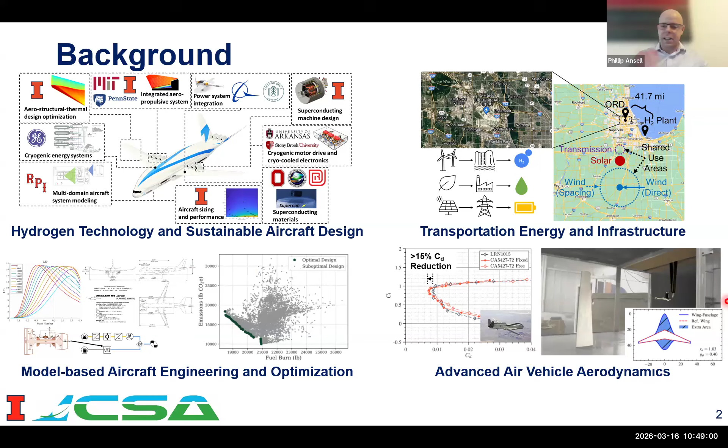And I'd be remiss if I didn't say, we've been in this. This is one of the things that we do within the work in hydrogen and aircraft technologies, so CHEETA, as you can see, is here. We do work, this is just kind of a brief background of some other things that my team does at the University of Illinois, looking at the landscape of hydrogen technologies and how it integrates into aircraft systems. We look at bigger life cycle elements here, and this is some of what you'll see today: on the production and supply side, what developments are necessary if we can reconcile the whole complex system of systems that surrounds the fuel system side. We also do a lot of aircraft design using model-based design and optimization, whether it be hybrid electric, whether it be hydrogen hybrid electric, which we'll talk about later, as well as I have a passion and background in aerodynamics, so wind tunnel testing, aircraft design, those types of things.

The work that I'm going to be talking about today, as I mentioned, is a little bit atypical for work that we present within my research team.

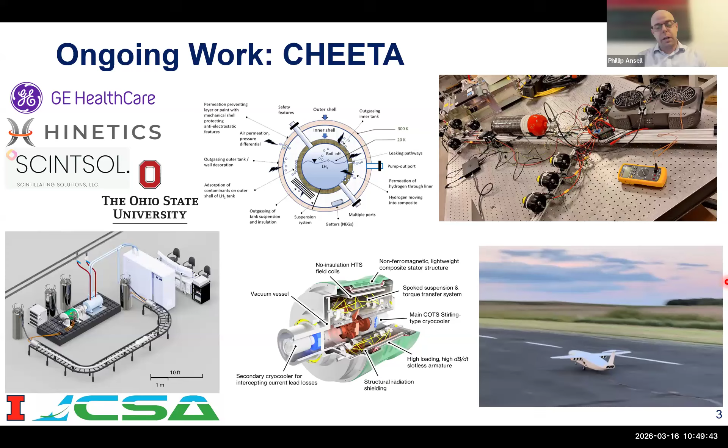Just to keep you all informed, we are continuing to do work on CHEETA. I saw Andy was in the audience today, so glad that I was able to show off some of the work that's ongoing there, whether it be to test hydrogen fuel cell systems on UAVs, or whether it be to develop advanced cryogenic electric machines that can offer dramatic improvements in specific power and efficiency, all the way to actually building prototypes of liquid hydrogen tanks. These are things that we have ongoing under that program.

We're also in the midst of working on this program, also supported by NASA, called AACES, and we're working that with Jet Zero, ZeroAvia, and a small group, SHZ. Here we're looking at the hardest to abate sectors, long haul wide body classes of aircraft. What kinds of technologies can we integrate, how do we marry hydrogen technologies with blended wing body aircraft technologies? We're cooking up some really interesting stuff. You'll be hearing more about it.

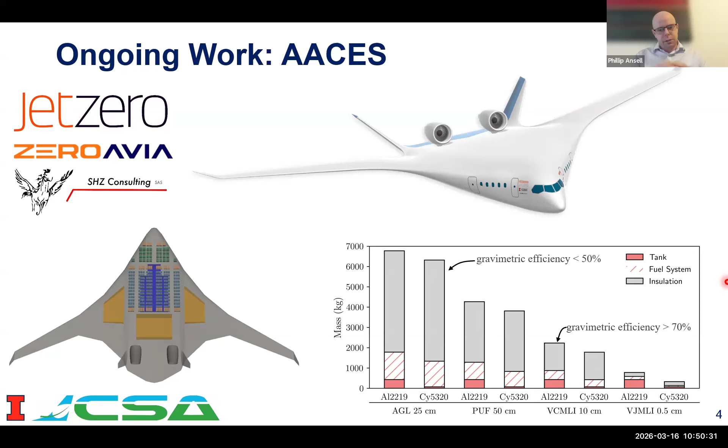One of the things that was indicated was ongoing things for the summer conferences. There's some work that we'll be presenting at AIAA Aviation, and there's going to be more things coming down the pipeline here into the future.

The hybridization approach here is perhaps not what you typically think. We're not taking fuel cell power and boosting the fan spool, but rather we're actually using it as a means to improve the adaptability of some of the core technologies. So allowing independent control of the overall pressure ratio as well as the mass flow through the core allows us to actually make the gas turbine engine functionally operate much more strategically across an entire mission duration. More on that to come, also incidentally, at AIAA Aviation.

But I'm going to jump into what we're going to talk about today. So today's talk...

This is all based on some work that I had my arm twisted to do by one of the editors of this journal, Progress in Aerospace Sciences. It's a great journal. This article is available in open access form, so anyone can go in and download it. It's available, feel free to pick it up, and there's more details in there under the hood of all of what this work entailed.

My disclaimer here, and I put this just because, again, this is like my crystal ball approach of trying to take this complex system of systems and project what is within the art of the possible around a scenario for hydrogen aviation by the year 2050. Not to say that we have figured everything out, not to say that we have reached this precipice where we have ultimately decarbonized the entire sector, but rather what is maybe a bullish but practical and technically credible view of what might be the case by that time frame.

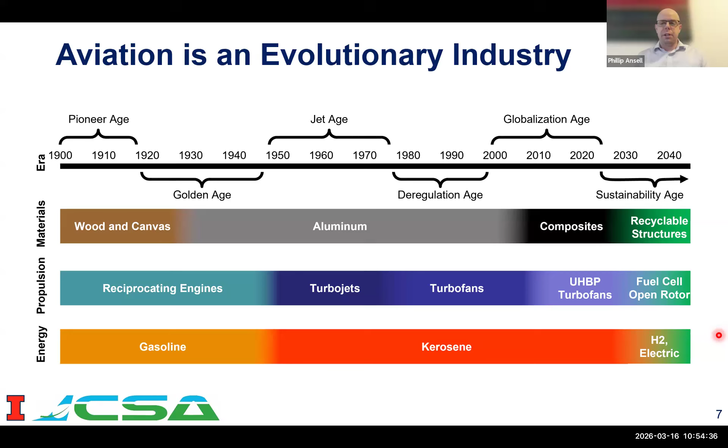Our goal should be, as we approach this future era, to create what I'm calling the sustainability age. We made a transition initially from gasoline engines to kerosene, largely owing to the fact that gasoline likes to boil at altitudes of 37,000 feet. Kerosene allows us much higher and higher speed flight. As we look towards the future, going towards hydrogen and electric is really what we should be aiming to do, alongside other developments across the aircraft technology landscape.

So, in practice, we have to look beyond the numbers and think about what are the actual cases and places where we can safely, at high capacity, economically, and in a technologically feasible fashion, develop a system for energy. Liquid hydrogen is one that does that.

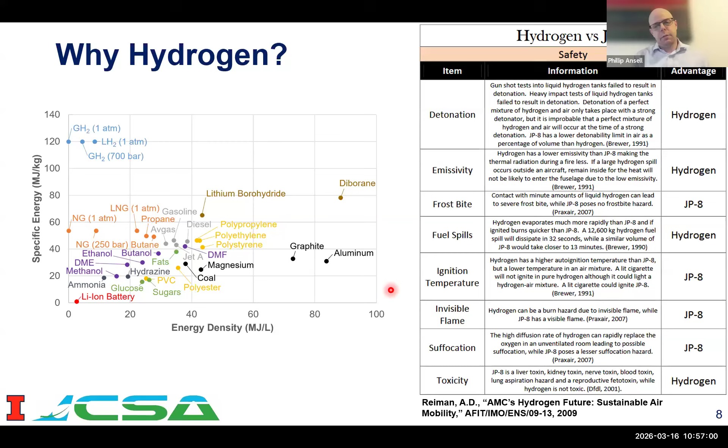There's a whole complex series of microphysics within the atmosphere, of reactions that occur that you won't find in other modes of transportation, because gas turbine engines have much larger overall pressure ratios compared to other conventional combustion systems that use piston technologies. So, for instance, we get more NOx emissions, but also things like aviation-induced cloudiness. You're not going to find aviation-induced cloudiness produced by a locomotive, because it's not at the cases and altitude considerations where ice supersaturated conditions form.

But ultimately, this leads to impacts to climate as well as damages in the form of social and welfare costs. So when we consider hydrogen, and I now look at the emission products, I'm eliminating the vast majority of these emission products.

I'm left with nitrogen oxides, and again, there's a whole suite of technologies being developed to limit the emission of nitrogen oxides from hydrogen combustion engines. And especially as we look at lean and micromix approaches, you can dramatically reduce the nitrogen oxide emissions. Of course, the water vapor emissions go up.

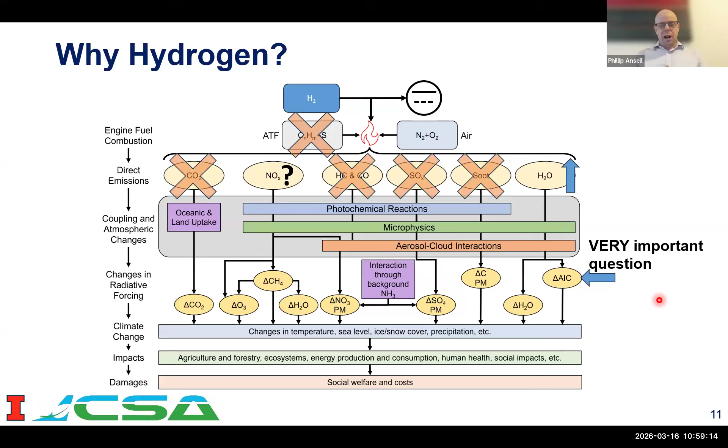I've seen plenty of studies that consider, oh, well, you're going to get far worse impacts of contrails, as well as ones that say you will have much less impactful contrail formation processes, so it's actually better. This is an important question that people are still grappling with, but I'm going to kind of wave over those for the day just for now.

So the direct emissions of hydrogen aircraft as compared to kerosene, we are expecting that there is going to be a dramatic reduction overall in the climate impact of these types of aircraft configurations. You can see the emission indices of a handful of different kerosene and hydrogen cases as inspired from the literature. And effectively, what an emission index is, is that as I burn some mass of fuel, whether it be kerosene or hydrogen, so 1 kilogram, I have an emission of some similar mass of this other quantity.

And then the global warming potential, or GWP, I can take that mass of the emission, whether it be NOx, whether it be water vapor, whether it be even just fugitive losses of hydrogen across my supply chain. There's going to be some CO2 equivalent of climate forcing that is produced. And we, of course, have these at various confidence levels. We understand CO2 very, very well.

But we're still working on understanding certain cases where NOx emissions at high altitudes have more complex interactions with the atmosphere. And so this could be a really important thing moving forward for hydrogen, is to say, how do we actually get to low NOx engines? Because everything else created equal, if you just combusted hydrogen using conventional combustor technologies, you might end up having actually tremendous increases in the NOx emissions that these hydrogen engines produce. So lots to untangle there.

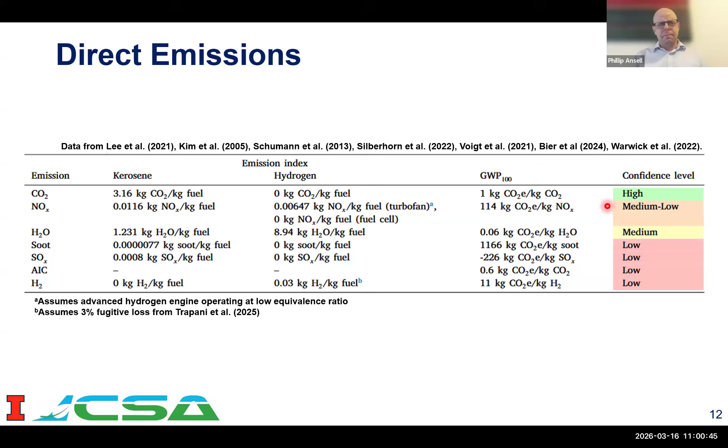And as we launch into thinking about the system level considerations on the supply side, what needs to happen in the energy landscape, I'll note first and foremost that we've been here before. And part of the reason why I'm not focusing so much on the hydrogen aircraft technologies at the moment is simply because we kind of already know that we can do this. Not to say that it's an easy problem, right?

But even 24 years ago in the EU Cryoplane study, this is a quote: the use of liquid hydrogen is technically feasible, and it would greatly reduce the environmental impact of aviation without affecting safety. If we start from that point, we might say, well, what were the missing pieces? It's been 24 years, and 2050 is also 24 years from now. Why is it that this didn't really take off in the fashion that the Cryoplane study said that it could?

And the missing pieces there were really about what's the availability and what's the economic competitiveness. Notably, economic competitiveness is one of the barriers that thus far has hindered hydrogen and hydrogen economies in aviation from being something that businesses can work with. So as we look at this renewed interest in the overhaul and transition to a hydrogen system for aviation, what can we expect within the next 24 years? Will it be any different? That's what we're going to talk about today.

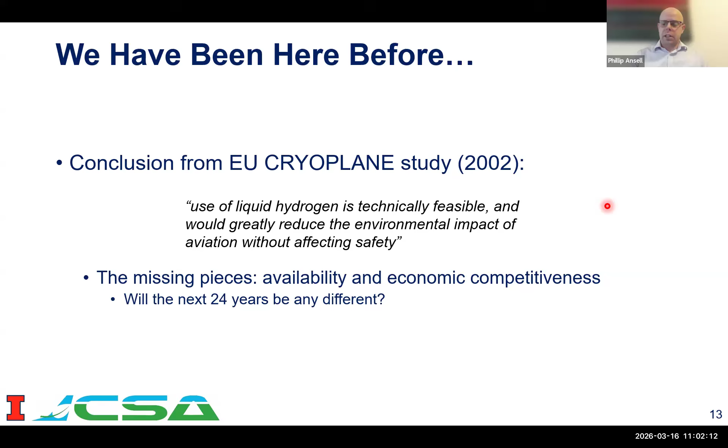So I'm going to pose this with a handful of driving questions. So by 2050, what will aviation look like? How many airplanes will there be? How far will we fly? How much fuel will we use? Second, how is fuel produced across the landscape of petroleum Jet A, of sustainable aviation fuel or synthetic aviation fuels, liquid hydrogen? What's the overall cycle implications?

Third, will there be enough hydrogen to support aviation applications? Fourth, how much will it cost? Fifth, what kind of infrastructure overhaul do we need and how much does it actually cost? And finally, is this actually realistic? Can hydrogen aviation be a reality at scale? So I won't spoil the surprise. We'll wait for it. So first and foremost, what will aviation look like?

We of course have something happened in 2020. I don't know if you remember it. That whole time frame for me is just a haze for whatever reason.

But we of course had a dip in overall flight activity. So RPKs are basically a person traveling 1 kilometer on an airplane. I multiply that by the total number of passengers on an aircraft and the whole total distance, and integrate that across a whole annual cycle. That's my revenue passenger kilometers of flight activity. This doubles more or less every 15 to 20 years. And so we're assuming a similar RPK growth of 3.6% per year, which is consistent with a lot of market forecasts in the sector.

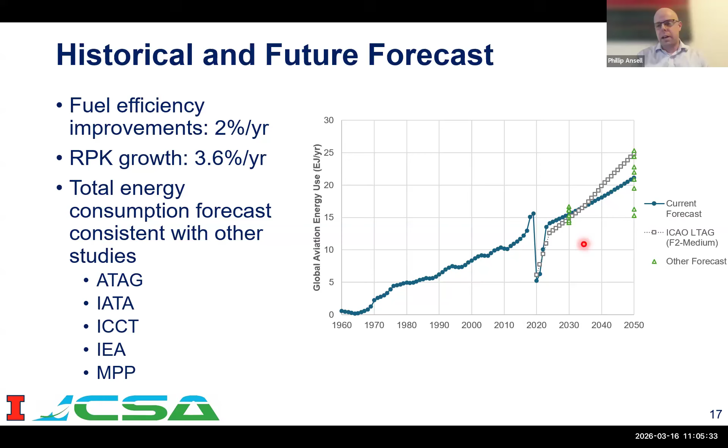Again, because this is a crystal ball approach, nothing is for certain in the future. We've compared this to a handful of other forecasts. So the ICAO LTAG medium forecast here assumes a little bit more of a bullish market for aviation. But we're sitting in the middle of some other studies and forecasts done by a few other groups as well. So that's about the amount of energy that we're thinking we might need in the future.

Now the next question is, well, what about airplanes? What kinds of airplanes do we think will be comprising the global fleets? And so we've similarly made market projections of how many narrow body, wide body, and regional jet aircraft we expect there to be into the future. This is inspired by, and the paper has more details on this, a handful of different market forecasts from Oliver Wyman as well as Boeing and ICAO.

And really important to take away here is that as we go from our current day all the way to 2050, I can't snap my fingers and just have transport class aircraft in service immediately. There's a whole overturning of the fleets that happens over time. And as we look at answering the question of how many hydrogen aircraft could practically be in the global fleets by the year 2050, it's not going to be 100%, especially if the first entry into service is not till maybe the late 2030s to early 2040s.

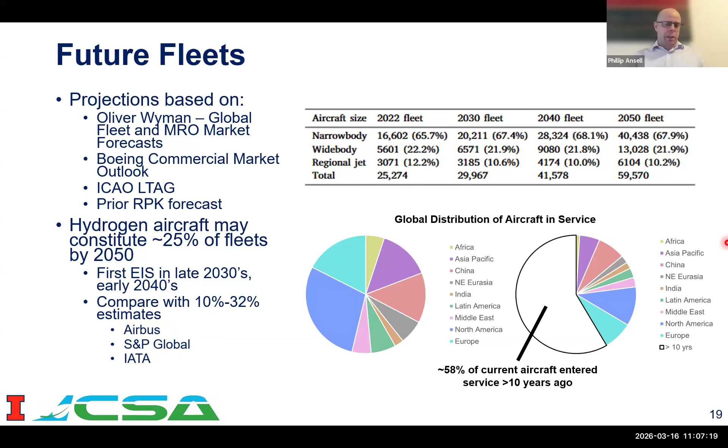Right now we're assuming that by the year 2050, maybe about 25% of transport class aircraft are hydrogen, most of those being regional jets and narrow bodies. And just to show this a little bit further, even today about 58% of current aircraft entered service more than 10 years ago. So every decade, we're not even covering half of the overall fleets of aircraft. So if we're not starting till, let's say, 2040, that's only the size of this wedge that we have to play with as far as hydrogen aviation is concerned.

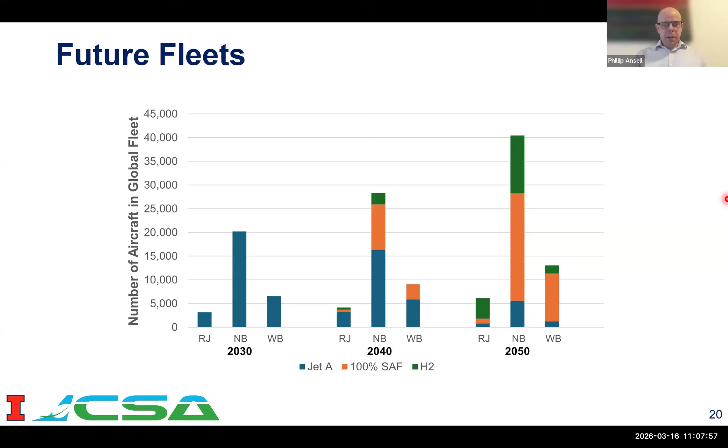So with that in mind, if we look into the future, right now we've got a whole lot of aircraft that can function great using just plain Jet A. If we consider 100% SAF compatible aircraft, they will likely enter service reasonably quickly, owing to some of the engineering challenges of 100% SAF compatibility that are solvable. And then here we've got the hydrogen cases, where principally these are regional jets as well as some narrow body aircraft, and we're anticipating maybe a few wide body airplanes, depending on when those aircraft would enter service as well. But about 25% of those global fleets.

So second, how is fuel produced? For this, I will gloss over this. There's a lot here. If I'm just being completely transparent about this, a lot of cases where we need to just take information from a whole variety of sectors and synthesize it together in order to make these conclusions about how much fuel is available, what the climate impacts and emissions look like, all that kind of good stuff.

So we're considering four different classes of energy carriers. The baseline petroleum Jet A: we dig it out of the ground, we refine it, it gets to the airport, we go. We've got, of course, biojet synthetic kerosene, which is effectively the traditional SAF that many of you are thinking of, whether it be HEFA processes, hydroprocessed esters and fatty acids, that use cooking oils or palm oil or camelina oil, and then take those long hydrocarbon chains and slice them up into the compatible kerosene carbon lengths.

And then we, of course, have power to liquid synthetic kerosenes. And in biojet, we're also assuming alcohol to jet. I forgot to mention that. Power to liquid synthetic kerosenes that use hydrogen as a direct feedstock, and then liquid hydrogen.

And I like this. This is just a bit of an aside, but here's all the different flavors of SAF. And I like the apples and oranges question to say how similar is it to existing petroleum Jet A? Is it apples to apples? Is it apples to different colored apples or apples to bananas? Right. So there you have it.

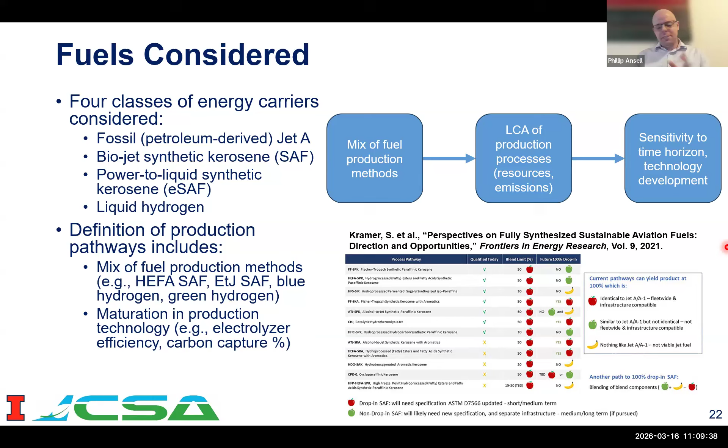First and foremost, if we're bookkeeping the energy and emission impacts of petroleum Jet A production, this one is very well understood. So here is effectively just a comparison of the life cycle implications associated with different regions of the planet where you might be producing jet fuel. Yes, it does make a mild difference. But lo and behold, this 89 grams CO2 equivalent per megajoule that the ICAO CORSIA baseline uses is roughly about right. So we just use that moving forward throughout the rest of this study.

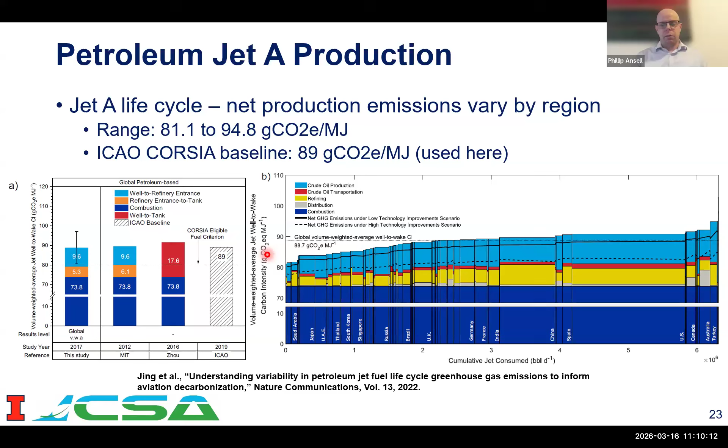If we're creating SAF, the next question is, of course, and we want to compare and understand, how much hydrogen is needed for power to liquid, or what are the climate impacts. It helps if we know what the production volumes are and the selected pathways that you're going to be using to produce those SAF fuels. So in the next handful of years, it's still likely going to be dominated by the HEFA processes. These are where we use oils and greases. Not so much power to liquid.

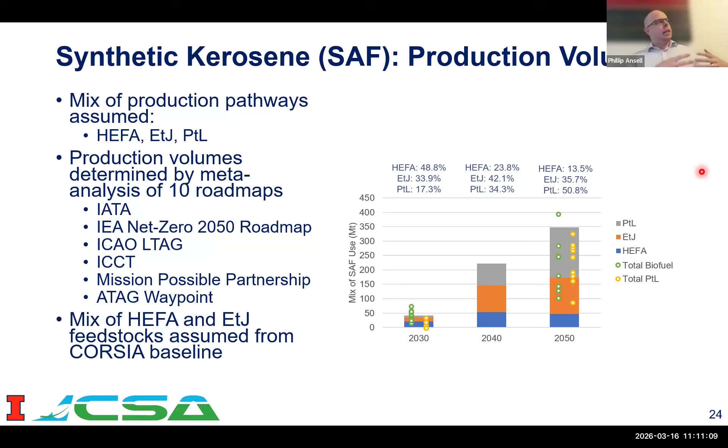By the year 2050, a lot of folks are predicting that HEFA will start to decline. We'll get more use of advanced feedstocks through lignocellulosic biomasses for ethanol to jet. But power to liquid ultimately will start to become a lion's share. We base these on a meta study of a whole bunch of different roadmaps. And so this helps us to say, whenever I create a pathway mix, how much am I assuming is power to liquid? How much am I assuming is HEFA? But even within those, it does matter what feedstocks we are using and where those feedstocks are grown, whenever it comes to HEFA and ethanol to jet.

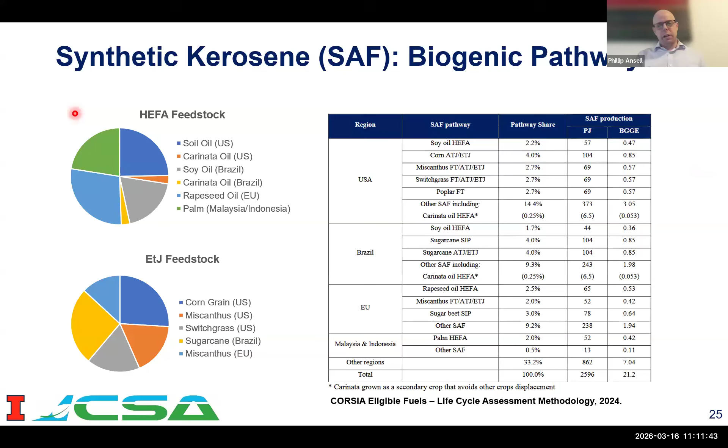And here you can see on the life cycle analysis basis, we almost have, again, these meta pathways-in-pathways types of things. We've got the pathway mix that says various HEFA processes, various ethanol to jet processes, various power to liquid. And even within the context of those, if you zoom in, you'll see pathways that consist of various feedstocks. And this is then the punchline of what we can expect. So for HEFA and for power to liquid, I'm going to talk a little bit more about the life cycle implications of hydrogen production because it is used as a feedstock here.

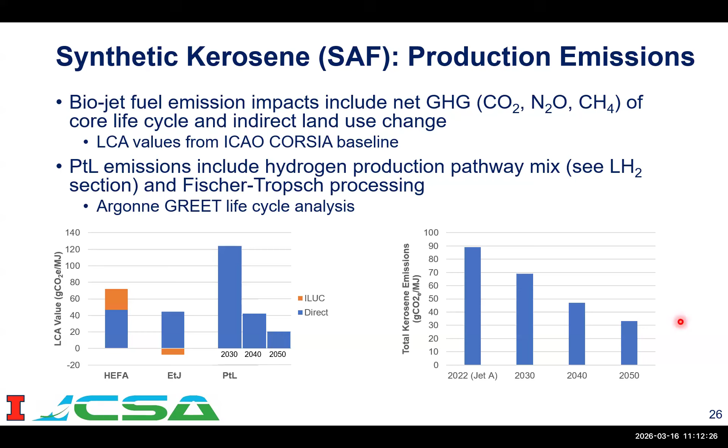We're assuming that low carbon hydrogen production will continue to increase as we get to that 2050 timeline. I also did effectively all these life cycle assessments using the Argonne GREET tool, so more information on that later if folks are interested. But this is kind of where we're landing: if I take the whole blend of these pathway mixes, we're down to about 30-something gram CO2 equivalent per megajoule by the time we get to 2050.

Now on to hydrogen. Hydrogen is the most plentiful molecule in the entire universe, so there are countless ways to create it. Many of you are probably familiar with this rainbow of colors of hydrogen production. Ultimately, what we're trying to get to is green hydrogen production, maybe pink hydrogen, or white hydrogen in terms of naturally occurring hydrogen, which would be really phenomenal as a bridge to grow the hydrogen economy in meaningful ways.

But each pathway, of course, has its own climate impacts on a life cycle basis. So there are ways it would actually be very counterproductive to the climate to just take the jump right now with some of these different means of producing hydrogen that rely heavily on fossil fuels without abatement.

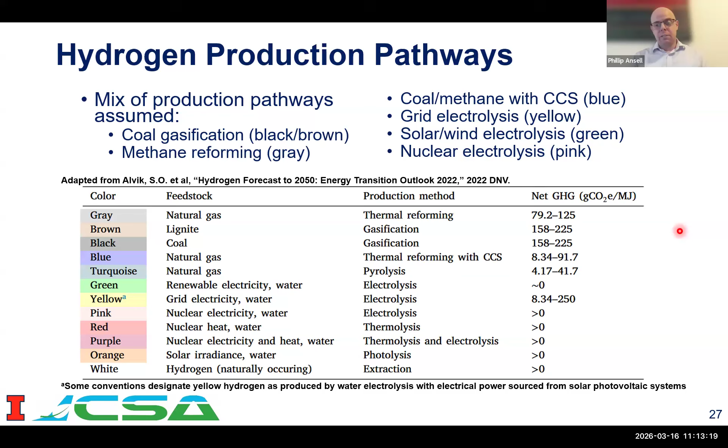As it comes to asking how hydrogen might be produced by the year 2050, we rely on data from IEA, which is a great global reference point for things like what volumes of low carbon production growth we can expect, as well as regional distribution of what resources exist in different parts of the planet for hydrogen production.

So in North America, we might have good penetration of blue hydrogen initially. The pie chart on the left is the 2030 split of hydrogen production, and the one on the right is 2050. In Eurasia, we might expect a lot of blue hydrogen in the longer term. In Europe, lots of grid hydrogen as well as green hydrogen, and so on and so forth.

What we see is that today we have primarily gray hydrogen production, which is of no surprise. But as we look to the next decades, we expect growth of blue hydrogen production, and then a real big uptick in green hydrogen production.

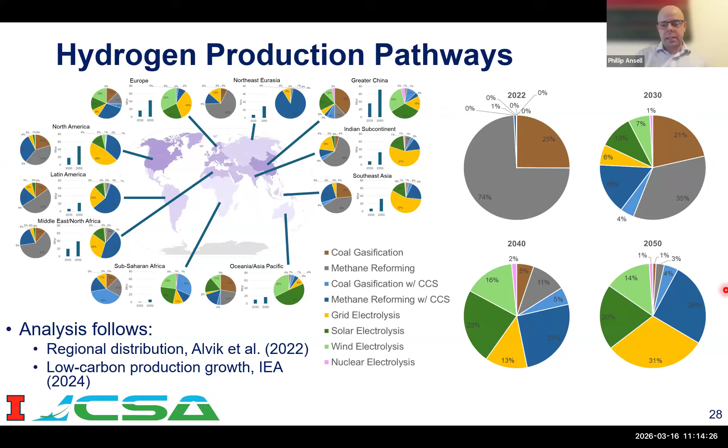Since I did mention grid hydrogen, it of course does matter where the electricity comes from. So we did an entire life cycle assessment using the electricity generation globally anticipated from IEA, to determine the total climate impacts of this mix of what the grid across a global landscape might look like in an aggregated sense.

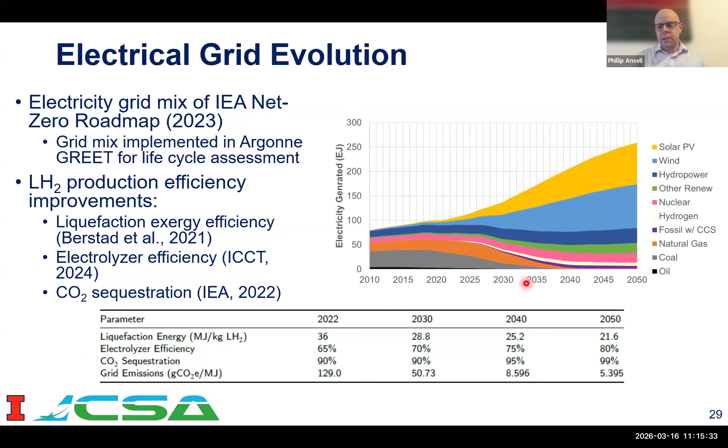All of the different values that go into hydrogen-specific steps like liquefaction, which of course is necessary for aviation, electrolyzer efficiency, and CO2 sequestration percentages across some of these blue hydrogen production pathways are baked into this. We end up also having grid emissions for effectively what the 2030, 2040, and 2050 mixes of these grids look like. So, like I said, it's a complex system of systems that are all interacting.

And the punchline of what emissions would look like for hydrogen production under this scenario is: if I was to go out today and use the existing gray hydrogen production pathway, along with technologies for liquefaction that are a ripe opportunity for us to improve—since a lot of liquefaction technologies are less energy efficient than they could be, it's low-hanging fruit for future development—we can get all the way down to below 20 grams CO2 equivalent per megajoule of this production process.

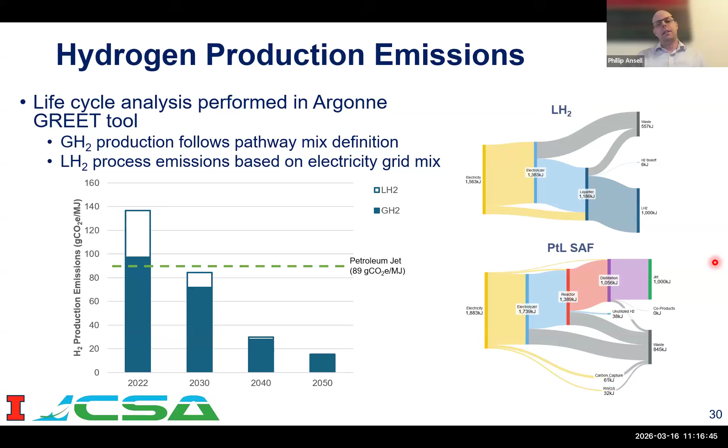So then this is the summary, right? And once I kind of rope in some of the aviation-specific emission products, this is what I get.

What I should also mention is that we've made some very broad strokes assumptions about things like how the low NOx emission technology behaves for these engines. I've assumed fugitive losses around a shrinking amount, but around 3% by the time we get to 2050, starting from about 9%. Hydrogen emissions into the atmosphere, while not a direct greenhouse gas, promote various reactions that do things like increase the lifetime of methane in the atmosphere. So we want to make sure we're accounting for all those different nuances as well.

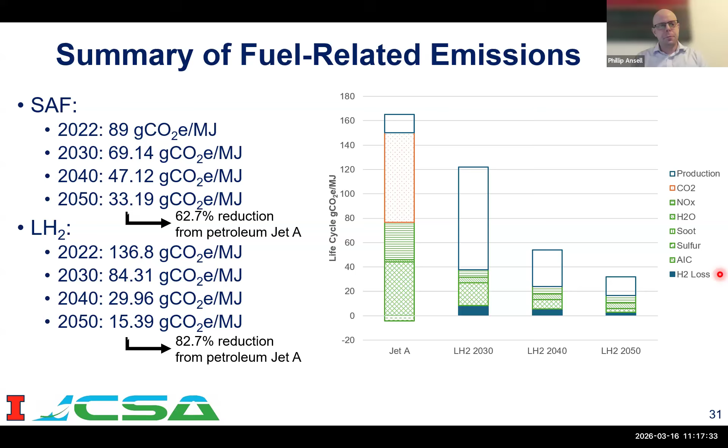So that's how fuel is produced in this projection to 2050, and the overall climate implications of these different fuel pathways.

Next question: will there be enough hydrogen supply to support aviation applications? The short answer is maybe. The longer answer is we created roadmaps for this as well, based on a meta-analysis of various roadmaps developed by other stakeholders. Today's hydrogen production is mostly used to support chemical development, largely ammonia for agriculture, but also refining and similar uses. We might start to see permeation into bigger energy markets. There's going to be tremendous growth necessary in hydrogen production volumes globally. This is the total production of hydrogen globally across all sectors. We're expecting maybe 400 megatons per year.

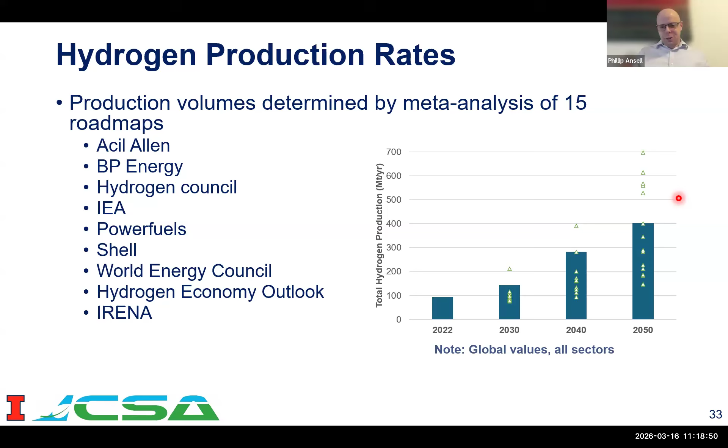We're kind of in the middle of the road compared to some of these different roadmaps. One of the big questions is: if aviation could use all of that hydrogen, great, we'd have zero problems. But the fact is aviation is a proportionally small stakeholder overall—this is a plot taken from IEA. Aviation currently does not really have any place within the landscape of hydrogen use. By maybe 2030 you start to see the presence of that, and it grows further into 2050, where aviation might occupy about 13 percent of all global hydrogen use. But we can't just assume hydrogen is produced globally and aviation somehow has use of it—it's a commodity many people will clamor to utilize. We need to be cognizant of that.

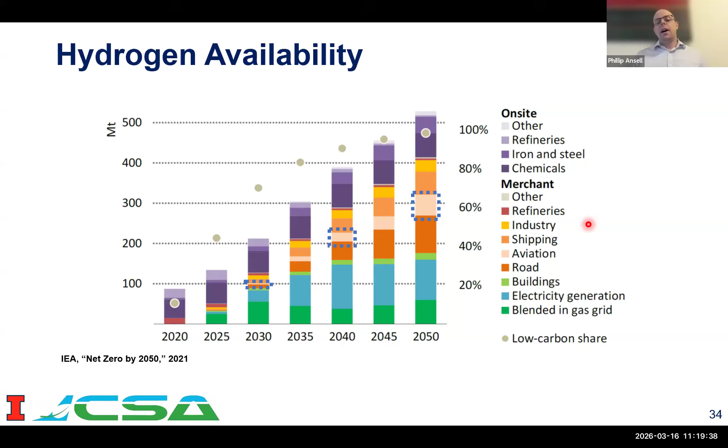Now the big question is: what about power-to-liquid SAF and liquid hydrogen, direct use, and reconstruction into kerosene? There's maybe enough hydrogen by 2050, according to the scenario, to support direct liquid hydrogen use. But the big question is how that dovetails with the power-to-liquid SAF use scenario. This is one where we have some projections—I haven't included them here simply because it's really difficult to say how these two systems are going to interact.

Hypothetically, if we need just around 20 exajoules per year for all of aviation activity, and say 25 percent of that would be necessary for liquid hydrogen aircraft—even though we wouldn't really need that much, since regional jets and narrow bodies don't use as much energy as wide bodies do—we would have enough, if there wasn't over-competition within the landscape of power-to-liquid SAF development. So that's the punchline: it's a 'depends' type of scenario, but in all likelihood, yes, we would have enough.

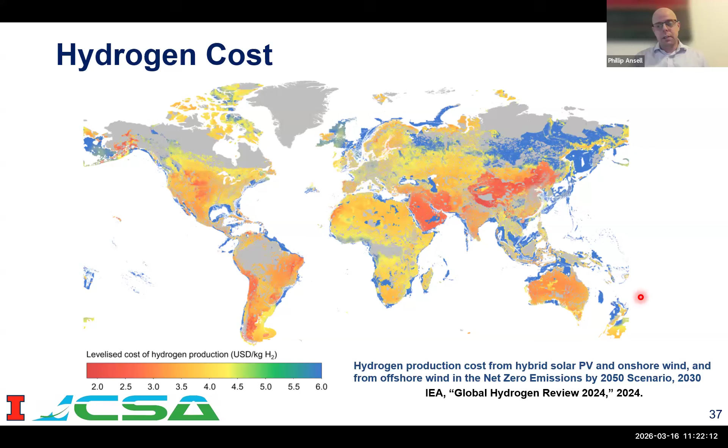So how did we estimate the cost anticipated for liquid hydrogen use in aviation? Well, it began with taking a meta-analysis of data from the literature. There is a phenomenal paper out there from Frieden and Leker, where they extracted a wealth of independent individual studies from the scientific literature.

We also had to incorporate things like liquefaction electricity, using the actual electricity load and future forecasts of electricity costs to develop the liquefaction electricity contributions to the cost forecast. We also include distribution and fueling stations.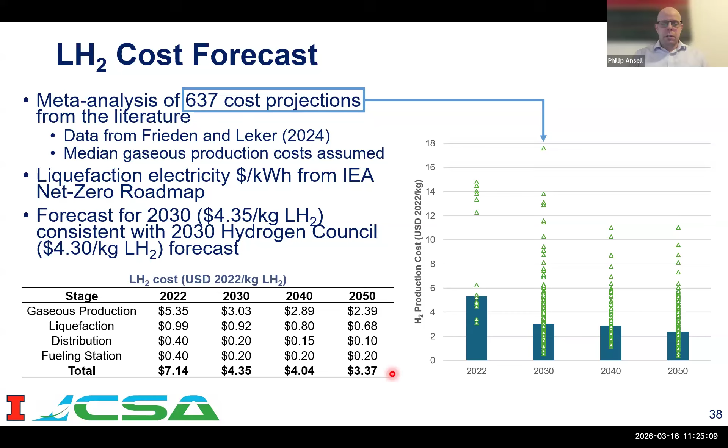That's one thing different from automotive and the like. This $7.14 current value is actually pretty consistent with liquid hydrogen delivered costs you might see today. As we look at the near term, 2030, this is where we get our biggest jump, consistent with the 2030 Hydrogen Council estimates. Then we see a bit of a plateau. But by 2050, this liquid hydrogen delivered cost to an airplane might be as low as $3.37 per kilogram.

But on a per-energy basis, comparing the cost of liquid hydrogen in dollars per megajoule to the dollars per megajoule cost of jet fuel, I find we end up with pretty decent parity in cost by the 2050 timeframe.

I also want to highlight that because of the volatility in oil and gas markets, if you're relying on a green or pink source of hydrogen that is renewable or zero carbon, the cost will be a lot more predictable, with less volatility. We see this today in electricity costs globally: there are seasonal fluctuations and growth as a function of inflation, but not the tremendous peaks and valleys we see with oil and gas. That certainty can be really appealing, because economically, knowing what future costs might look like is sometimes just as important as bringing the cost down.

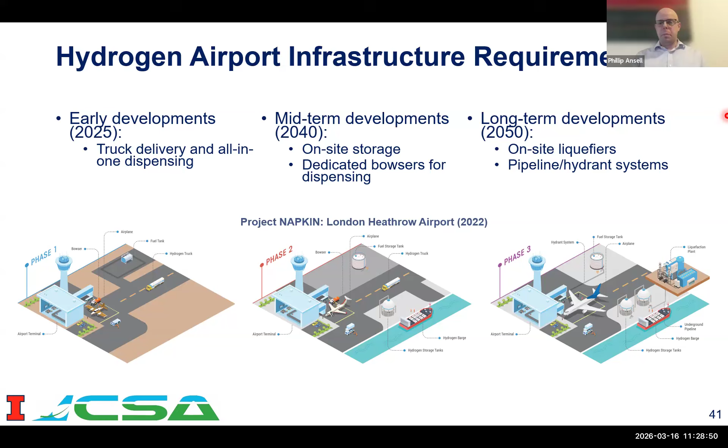So here's an example of some things that you would need under that landscape. We've got hydrogen storage tanks for liquid hydrogen, fuel farms that look a lot like what we use in space launch systems today. We would need pipelines that can do things like have outgoing liquid hydrogen fuel pumped through to the gates.

As well as gaseous return lines for the boil off, as well as inerting lines and maybe some sort of helium gas inertion process, as well as digging trenches and putting in these pipelines across these airports.

These are some classic studies maybe some of you are quite familiar with. But having other safety measures - I like this Lake O'Hare example, as someone who flies through O'Hare a lot - where if all else fails and you can't reuse the gaseous hydrogen, you just go and safely terminate it by burning it, outside of a conflicted airspace region.

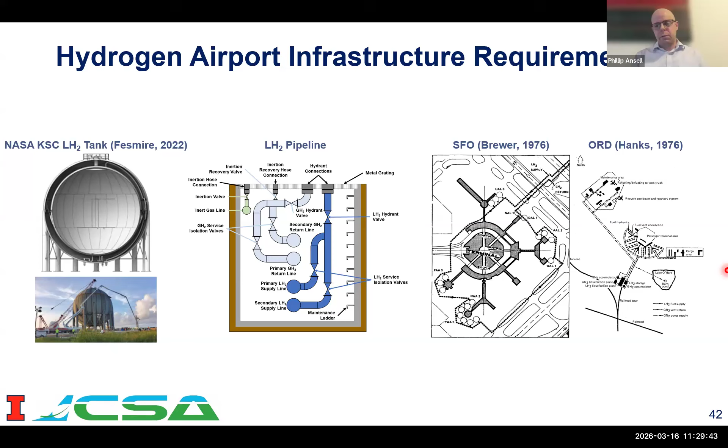But how much would this all cost? Largely the World Economic Forum and McKinsey at one point did a study on this, and they similarly assumed about 25% of all new aircraft would be supported with liquid hydrogen. They said somewhere in the ballpark of 600 billion to 1.66 trillion dollars.

And interestingly enough, this value is actually commensurate roughly with what you would need for doing an entire overhaul of the energy system just for SAF itself. This is a lot of money, right? And they also forecast the overall cost on a per airport basis that you would need in order to support an international hub, or like a large regional airport, or even like smaller regional airports as well.

It's quite unlikely that you would be utilizing right away these hydrant systems. Even I fly out of a regional airport quite often, at Champaign Airport - they don't have that, they use fuel trucks. So with that in mind, getting these types of on-site Bowsers would be really great for those types of airports.

But whenever I fly to Chicago O'Hare, really at one point you're going to have to rip the Band-Aid off and put on-site liquefaction and hydrant support. That being said, the lion's share of the cost of this whole transition scenario is not the Bowsers, the liquefiers - although liquefiers are very expensive - and the hydrants.

It is just in the production process of the fuel, right? Scaling up the global production of hydrogen itself using a whole variety of technologies and capabilities, electrolyzers, that type of stuff - that's where about 90% of the overall cost for this whole system comes into play. Even though the costs are sobering for the on-airport systems, it's still only about 10% of the total cost of this process. It's really kind of the energy fuel production and processing costs that we need to support.

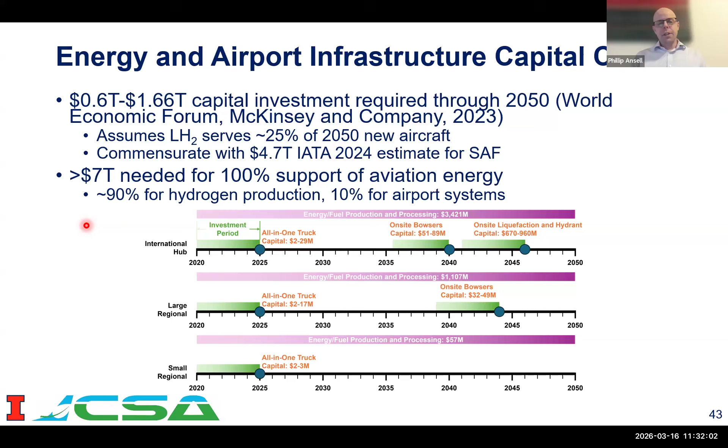And now to the reality check.

I've done a lot of this crystal ball scenario development. Anyone can make up a number, although I like to think that these are based on technically credible sources that are going to want prioritization of sustainable and renewable technologies in power and energy.

But let's talk about this. There's this ongoing idea that because of the way hydrogen integrates with high volume, it inherently makes airplanes less efficient. We've been studying hydrogen aircraft design for almost a decade within my research team at the University of Illinois. What I'll tell you is there are ways you can make hydrogen integration more efficient than traditional aircraft designs. One of which, of course, is fuel cells.

So we've done studies on integrated propulsion systems that are 100% hydrogen electric. Compared to turbofan cases, you get more bang for your buck out of the fuel. It's plain and simple. The integrated propulsion system does include the influence of the tank, the boil off, the heat exchanger system, and the variable power-sensitive efficiency of the fuel cell itself - lower efficiency at takeoff, higher efficiency at cruise, all that stuff. So yes, you can make an integrated fuel cell propulsion system more efficient than a turbofan quite easily.

We also see that when it comes down to making airplanes that are larger and cover longer cruise distances, they can close at the multiple thousands of nautical mile landscape. This is something we're doing in the NASA ACES project right now, Jet Zero and Company.

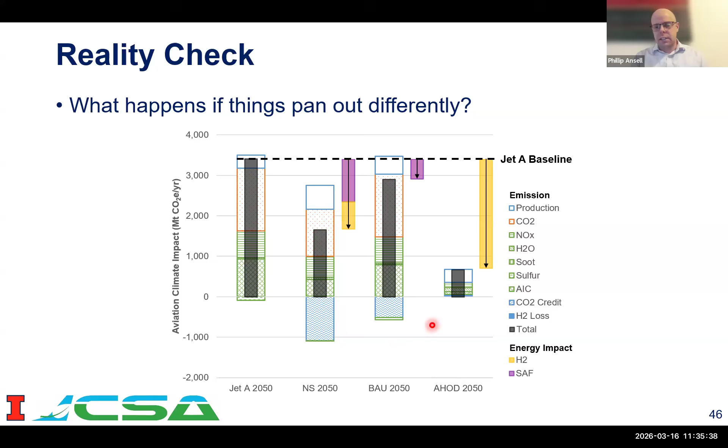And we have an all hands on deck case down here where we do make the rapid improvements in the technologies, we do close these aircraft designs, we field them to market very rapidly, and we have basically large penetration of hydrogen aircraft in this scenario. I like to lay out this all hands on deck scenario as a thought experiment that is compelling, because the question is: is it even technically possible for this scenario to be realized? That will inform our nominal scenario a little bit.

Is this a reality check that we need to go back and revisit? Turns out that multi-trillion-dollar investment requirement I've referenced - the 1.66 trillion all the way down to maybe 0.6 trillion infrastructure cost - if we took an average of 1.2 trillion and amortized it across 10 years, it's about 0.1% of global GDP.

Is there enough money in the world? The answer is yeah, there is. And how do I know that? Aviation, as we all know, actually has a catalytic process that helps global economies. Aviation activity supports about 3.9% of global GDP.

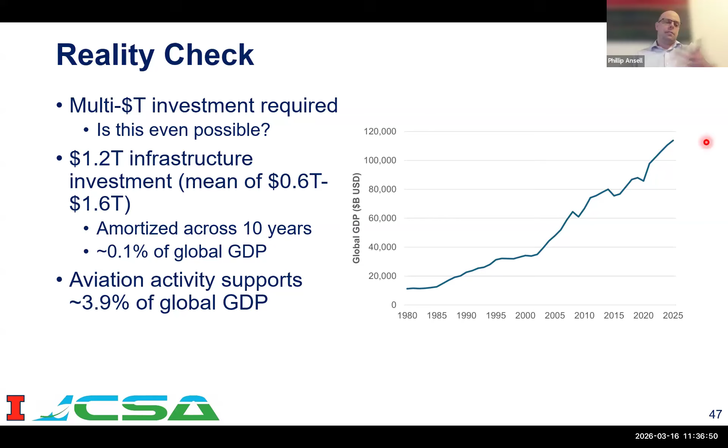So what I'm suggesting is, can we take a fraction of that? You could even amortize this not across 10 years, but a longer time frame, right? But it's a small price to pay in the global GDP context, which is easy for me to say as an academic. This is again where plugging into the policy bits plays a big role.

The other reality check here is if I take this all hands on deck approach and you say, well, you told us earlier that you can't just flip a switch and introduce brand new aircraft into the transport system. And I say I agree, but is it technically possible? Well, what I'll say is that we maximized the number of deliveries of regional jet all the way to wide body aircraft in 2018 when there were 1,729 aircraft produced per year.

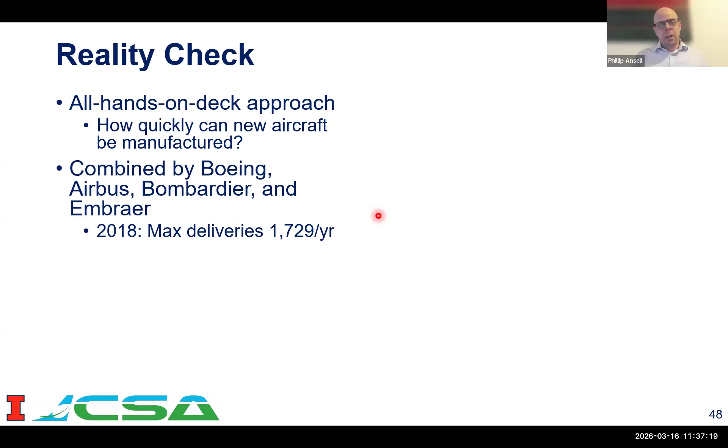But in an existential, I guess I'll say, context, we've been here before. In the 1940s, driven by World War II, the United States alone produced around 300,000 new airplanes within a 5-year period. And you might say, well, those airplanes are different than what we fly today. And I say, I agree. But also about 30,000 of those were heavy or very heavy bombers that have inherent characteristics that meet the same wingspan and takeoff weights as conventional transport aircraft.

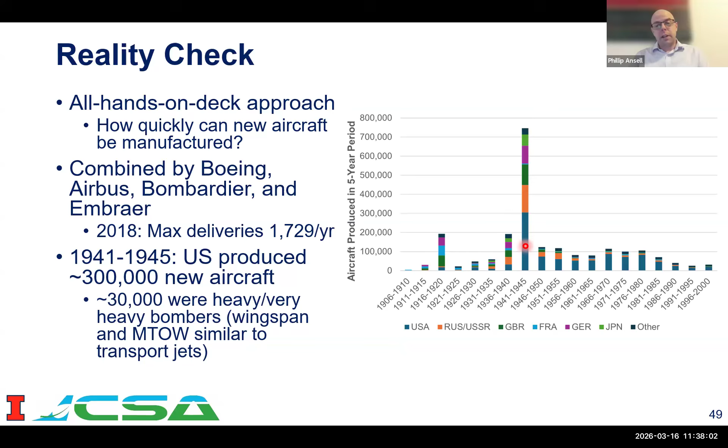And so as a consequence, if there was some existential external forcing, and I don't mean to be too dramatic about this, it's technically possible to produce those volumes of aircraft to do a rapid turnover of the fleets. So with all that being said, I'm going to end it there.

This is, of course, just a wacky idea of one guy who is thinking, is this overhaul possible? What is a technically credible approach that, yes, is admittedly bullish, but does not have any showstoppers? How do we now go from this blueprint of what needs to happen and start executing and putting it into practice? So I'm really grateful that I have the opportunity to share this vision, and to chat with many of you about what we go and do from here.

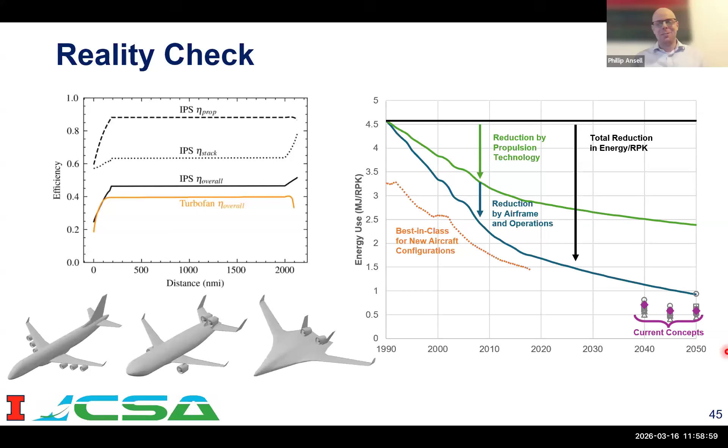Awesome. Thank you. Okay, we have time for one more. I apologize, I had to skip a few, but I really like this question about the stuff happening in Iran. And then I'm happy to stay on for a few more minutes and we can chat about some of the other questions. But Phil, you do not have to stay. Sorry, it wasn't Sarah. It was Sergey. I'm sorry, I don't know if I'm saying your name correctly, but please ask that question.

Fantastic presentation, Philip. Thank you. How do you assess the potential impact of the wars in Iran and Ukraine on the development of hydrogen technologies? That's a good question.

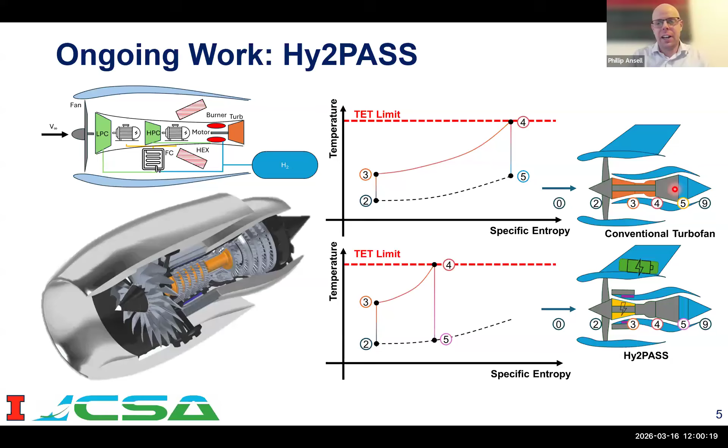The way that these types of events destabilize all sorts of global systems, the uncertainty that produces is certainly something that is underappreciated. And so I haven't actually looked at what the current prices for jet fuel are. I could go in to see what those things look like. And it would be fascinating to look at how the current war with Iran changes things.

So I think that it comes down to a few different considerations these events pose. The first is there are strategic reasons to make a nation or nation state more tolerant of these disruptions. Of course, the hydrogen global market we anticipate will be just that, global, right? There will be those that are producers and those that are importers. But there are ways that you can stabilize a lot more of these markets. And so, from a strategic standpoint, you will likely see that happening.

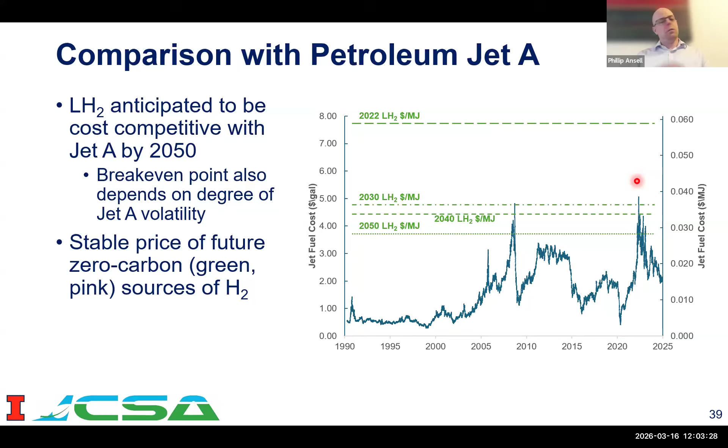Thank you. So, Philip. Sure, thank you.

Certainly. And I think Phil, we're thinking the same thing. My comment earlier, no way am I insinuating that war is good or there are winners in war. There just aren't. But there is a need for high altitude, high endurance aircraft. And so that's why I was mentioning the China thing. We've sort of lost that chance to compete with battery powered drones, right?

But with hydrogen, there presents an opportunity where it could be a strategic advantage in a war, which could also give a country a chance to be a little bit less dependent on what we have access to in terms of fossil fuels. We could take that advantage to manufacture aircraft and create less dependent energy systems as a country. So I think we're sort of saying the same thing.

There are loads of questions, but I think we should end there. And there's one more if you want to do one more. There is one that I really liked.

Sure. Okay, Rich. I don't know if you're here, but Rich asked if you could comment on the power source for producing hydrogen at an airport, for example, at or near the airport hubs, or, for example, nuclear. Yes. Oh, this is a good question. And I'm not going to pull up the slides because I have something else that I like to reference. So if you haven't noticed yet, I like to do these kind of thought experiments of, if I snap my fingers and I make a change, what does that change look like?